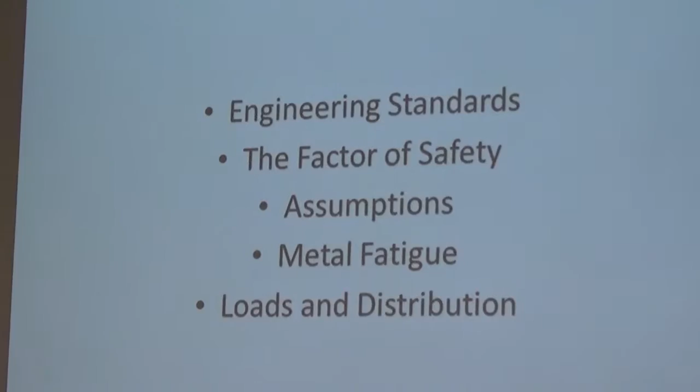The factor of safety can be illustrated this way. In the example of this building, assumptions on wind loads, snow loads, things hung from the roof beams like hoists are made, and then the beams are designed. Throw in the variability of a bad batch of steel also. Then a factor of safety is applied. A factor of 2 would be to double the estimated loading, and therefore doubling the strength of the beams.

I do not know what factor of safety was used in designing this building, but obviously it was not enough. Other projects involving human safety, or having catastrophic results of failure, or the possibility of exceeding assumptions, can use a higher factor of safety. Roads and bridges are good examples. Railroad locomotives grew larger and heavier, bridges failed. Interstate highways and roads in general are subjected to more traffic and heavier loads than they were designed for in the 1950s. Look at Interstate 80 after it came through Grinnell.

These also illustrate yet another assumption in the calculation of the factor of safety: what is your assumption of the life of the structure and the stress it is subject to during its assumed life? The example for this is in the advertising of the new Buick convertible.

The prototype, Cascada, was subjected to speeds of up to 31 miles an hour as the electro-hydraulic mechanism for the roof was cycle tested 15,000 times, the equivalent to operating the top 4 times a day for 10 years.

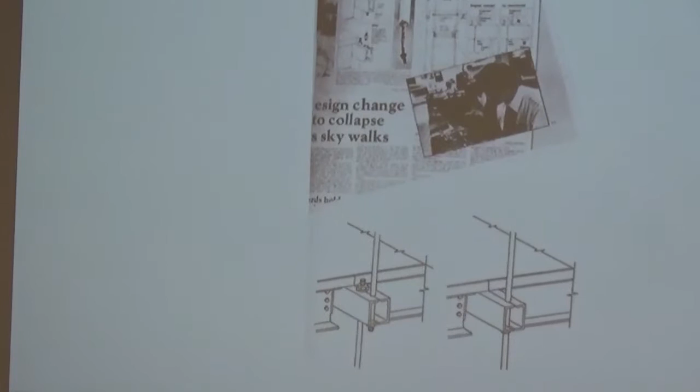Somebody had the bright idea of using two shorter rods, as in the left-hand drawing, instead of the one long awkward one. They drilled two holes in the intermediate skywalk for the connection to the lower skywalk and the connection to the main upper hanger rod. But oops, this put the weight of both skywalks onto the one intermediate connection, versus just the weight of the upper skywalk.

Now the stress was doubled in the connection for the ceiling rod to the intermediate skywalk, as both skywalks' weight was passed into the one connection. In the right-hand design, the rod goes clear through and you just had a nut and washer, so all the weight of the upper one is on the same rod on down to the lower one. Over here, just the upper skywalk was on the right-hand side, and the lower one was down below, so all the weight was transferred into the one connection where the bolt and nut washer is. And that contributed to it.

Then add all the people you can put on both of these skywalks for the view, the aesthetics. Throw in dancing or rhythmic swaying with the music, and the load is multiplied. With an already unfavorable factor of safety in place, the makings of a disaster are in place. The doubly overloaded connection gave way, undoubtedly spreading to the adjoining rods of the same kind of assembly, and down came the bridge. Oops.

How many years after it was built? That was at, I think, the dedication ceremonies for it. It was almost immediate, almost brand new. Yes, yes, yes. Jeez, they had a big party.

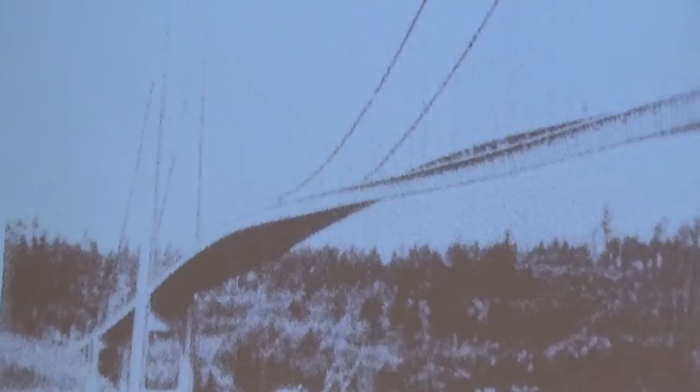Highway bridges — how many of you have driven over a modern, long suspended bridge, such as the Mackinac Bridge at the Mackinac Straits? Did you take up the offer of a paid driver? Was the weather nice? What was your experience? I have driven over the bridge, and it was interesting, but okay.

This leads me — now Joanne, when do you want to break? As soon as you come to the next point. We'll do this.

This leads me to the Tacoma Narrows Bridge, Galloping Gertie. I think KGR referenced that on their failure on the 7th of November 1940. The bridge was opened to traffic on the 1st of July 1940. It lasted 4 months.

The following is an excerpt from Petroski's book on page 163. Bridge designer Othmar Ammann has written: 'The Tacoma Narrows Bridge failure has given us invaluable information. It has shown that every new structure which projects into new fields of magnitude involves new problems for the solution of which neither theory nor practical experience furnish an adequate guide. It is then that we must rely largely on judgment, and if, as a result, errors or failures occur, we must accept them as a price for human progress.'

From Petroski himself: The Tacoma Narrows Bridge was one of the most spectacular failures in the history of engineering. This first suspension bridge connecting the Olympic Peninsula with the mainland of Washington State had a narrow, 2-lane center span over a half-mile long. It was an unconventional design in that the depth of the roadway structure was diminished by employing a stiffened girder design rather than the then customary and necessarily deep open truss.

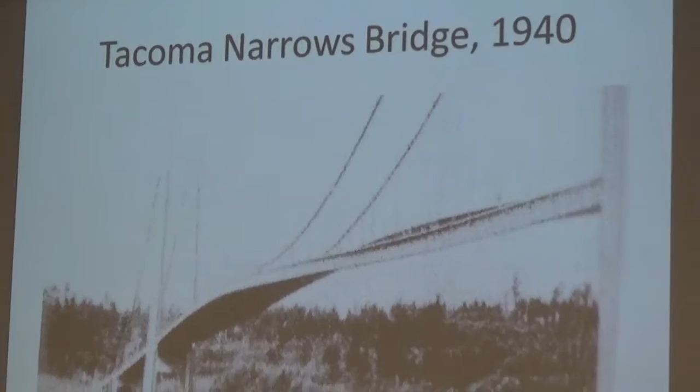The Tacoma Narrows Bridge was one of the most spectacular failures in the history of engineering. This first suspension bridge connecting the Olympic Peninsula with the mainland of Washington had a 2-lane center span, a half-mile long. It was an unconventional design in that the depth of the roadway structure was diminished by employing a stiffened girder design rather than the customary and necessarily deeper open truss. This innovation gave a slender silhouette whose appearance was dramatic and graceful, but the shallow, narrow span was also very flexible in the wind. The roadway undulated dramatically during construction and continued to behave abnormally for months after it was opened to traffic in 1940.

The bridge, which came to be known as Galloping Gertie, drew thrill seekers who wanted to experience the drive-on roller coaster. On the day of the collapse, the bridge's roadway gave fair warning of its final fling, and it was closed to traffic before conditions got too dangerous. The last spectacular motions of the roadway being twisted to destruction were recorded on newsreel film even as the engineers were trying to understand the phenomena of its aerodynamic instability.

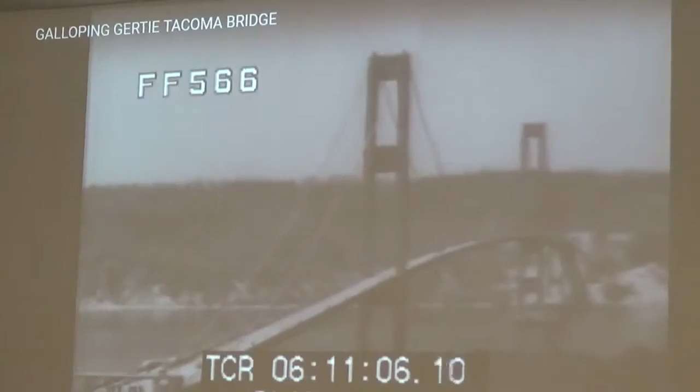The Tacoma Narrows Bridge, dedicated in 1940, was the pride of the Northwest, then the third longest suspension span. It became known as Galloping Gertie, as it swayed in the winds sweeping up Puget Sound. 4 months after it was opened, those winds sent the bridge into a rhythmic dance of death. It literally shook itself to pieces. Caught in the middle of the bridge was a Tacoma newspaper man. The bridge twists and sways in its death agony. Since its opening, engineers have studied ways to end its strange vibrations. They claim to be on the threshold of success, but too late. The reporter, Leonard Coatsworth, manages to fight his way to safety, most of the way on his hands and knees. He abandoned his car with a pet dog inside, the only life lost in the disaster. Giant cables are under stupendous strain as the great roadway of the bridge whips about like some fluttering ribbon. These pictures have been acclaimed as some of the greatest ever taken. Here it goes.

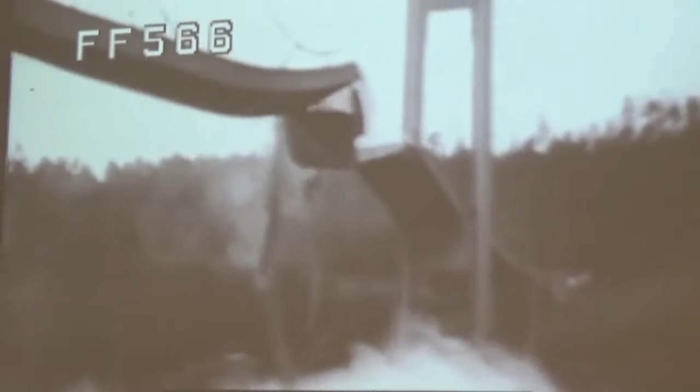Solid side railings were responsible. A twin bridge on the east coast, New York's Whitestone, has side railings that allow the wind to blow through. A footnote to history: the bridge was torn down for scrap and a new one built, but Galloping Gertie will always be remembered.

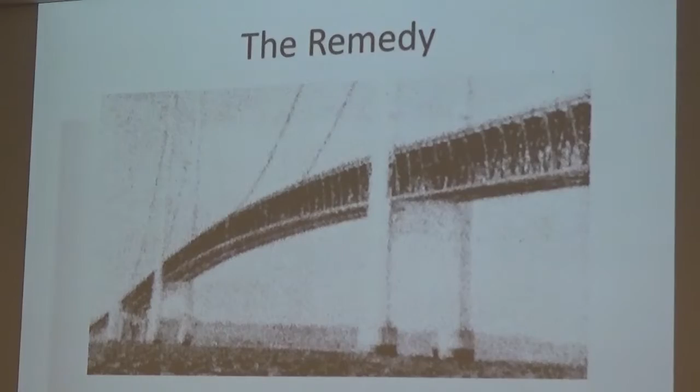Galloping Gertie. There's your deep reinforced, or diagonally braced, whatever you want to call it, that I was speaking to, versus the Tacoma Narrows Bridge. That gives you a lot more stiffness. And like I say, they were testing it in the wind tunnel as it collapsed. They didn't even think to put it in the wind tunnel to see what it would do to it.

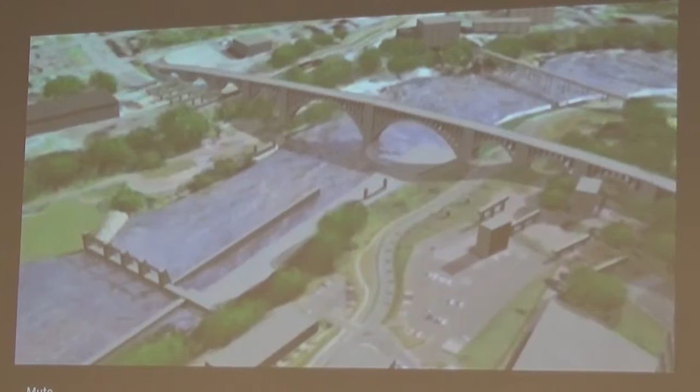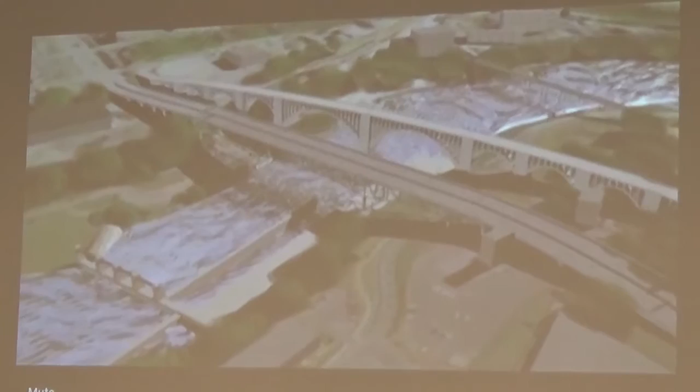I don't think it showed a gusset plate in it, it just showed the bridge collapse. The original design led to a serious error in sizing some of the gusset plates in the main truss. On March 17, 2008, the NTSB announced an update on the investigation relating to load capacity and design issues, computer analysis and modeling, digital image analysis, and analysis of the undersized and corroded gusset plates. The investigation revealed that photos from a June 2003 inspection of the bridge showed gusset plate bowing.

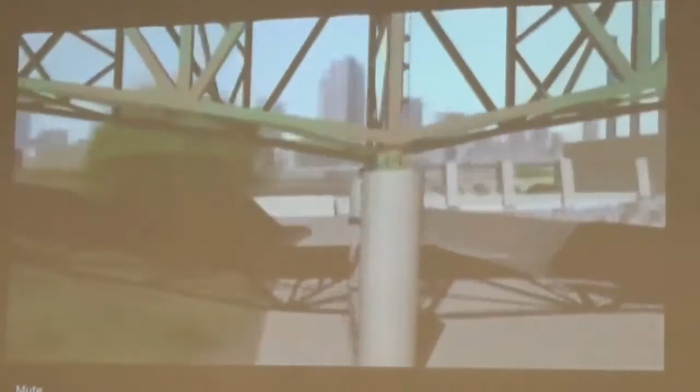On November 13, 2008, the NTSB released the findings of its investigation. The primary cause was the undersized gusset plates at 0.5 inches, 13 millimeters thick. Contributing to that design and construction error was the fact that 2 inches, 51 millimeters, of concrete were added to the road surface over the years, increasing the static load by 20%.

And of course, just east of town, we put the blacktop down over Highway 6, so that's what they did there. They put more concrete down for the road surface.

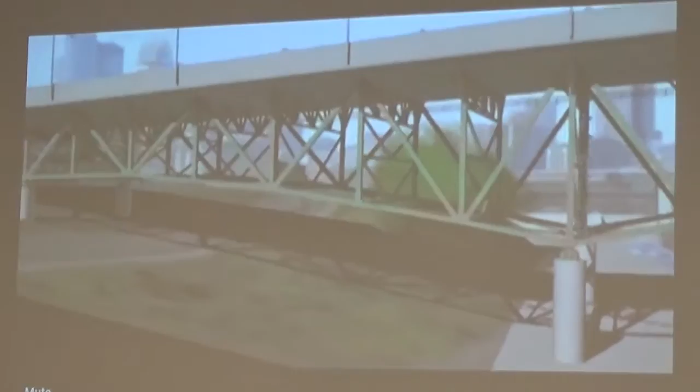Also contributing was the extraordinary weight of construction equipment and material resting on the bridge just above its weakest point at the time of the collapse. That load was estimated at 578,000 pounds, 262,000 kilograms, consisting of sand, water, and vehicles for construction to repair the bridge.

The NTSB determined that corrosion was not a significant factor, but that inspectors did not routinely check that safety features were functional. The inspection showed the potential for failure, and then it was aggravated by overloading.

Oops. Kind of fun, that part of the internet sometimes I enjoy. Sometimes part of it can be left up in the cloud. So, say what? Well, that's what I wondered if it was on. But I changed my hearing aids too, Joanne, so I can't tell. You got control of it back there in the cupboard somewhere, Jack.

We're okay. On March 17th, there it is, 2008, let's see, we did that part of it.

Now let's go back to Grinnell, and the Mayflower's Water Tower Square. When the excavation for the footings was begun, it was deja vu, the same as First Baptist Church. According to the job superintendent, Kenny, soil boring apparently had been done, but not shared with Story Construction. The upshot was extra excavation was done, more gravel packed into the cavity, and then footings were poured. So let's hope there are not cracks in that building in 60 years.